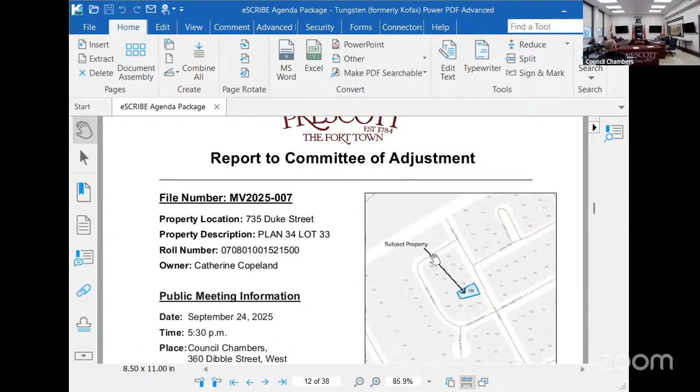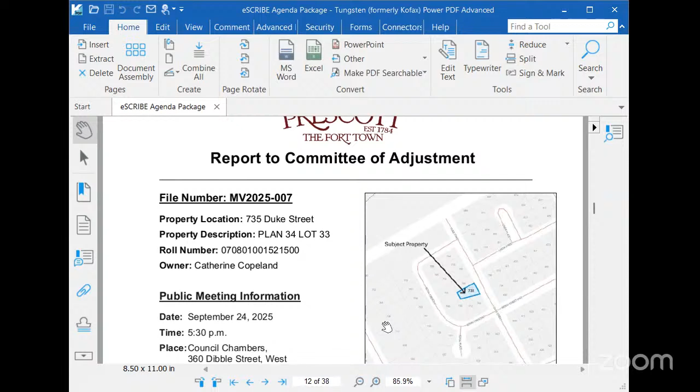Yes, thank you, Mr. Chair. Can you hear me? Yes, I can. Thank you, Tim. Perfect. Okay, so this is a minor variance to reduce the front yard setback and the side yard setback for a proposed carport, which is going to be located on the south side of the dwelling.

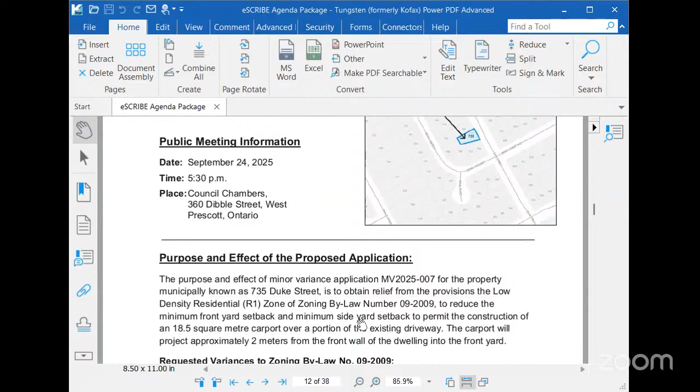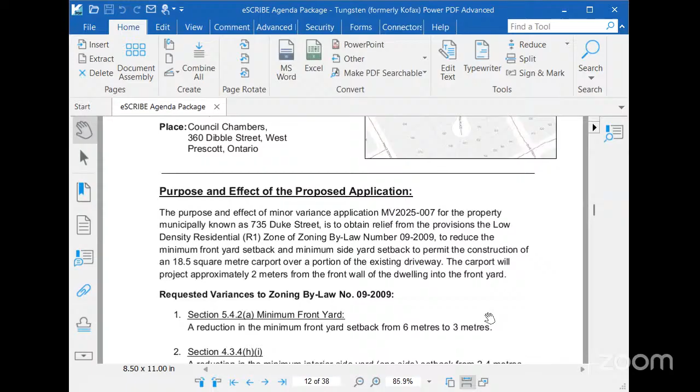The property is designated residential in the official plan and zoned low density residential R1 zone in our zoning bylaw, which is the same zone within the neighborhood and on the abutting lots as well.

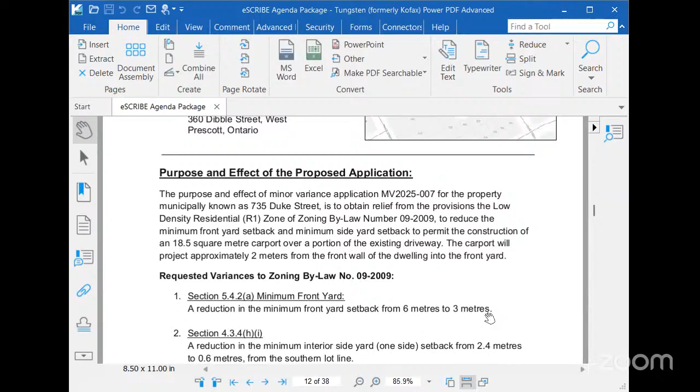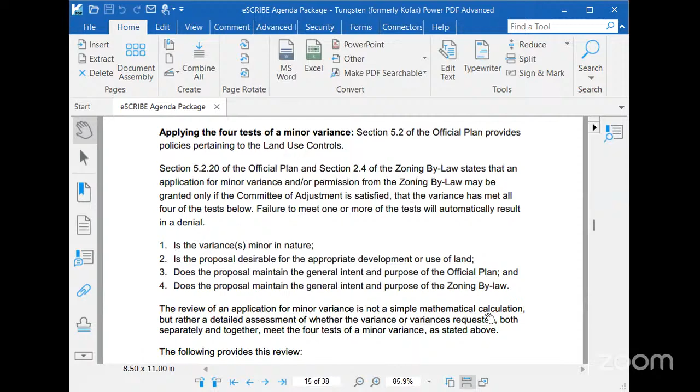In regards to the 4 tests of a minor variance, we have to ensure that the variance is minor in nature, that the proposal is desirable and appropriate development for the use of the land, and that it maintains the general intent of the official plan and the zoning bylaw. I'll just go through that once so on the next application we don't have to go through it again.

So in regards to this proposal, we worked with the applicant to come up with a plan and setbacks that could accommodate a carport or some sort of covering in order to keep her car out of the elements.

We are looking to support a 2-foot or 0.6 meter setback for the side yard, which would accommodate location of eaves and eaves troughs and ensure that would not encroach into the neighboring property.

And the reduction in the front yard setback, the projection of the carport would project out roughly to the same point of where the walkway is on the existing house.

The reduction in the front yard setback would not interfere with existing parking on the property right now. It would actually still provide 1 parking space within the carport and another parking space which is partially on her property and partially on the road allowance, which is not the travel portion of the road. So it can still accommodate 2 parking spaces here.

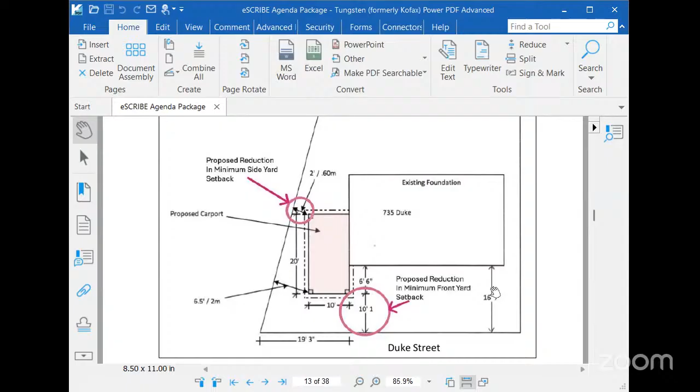So in regards to the neighborhood, we took a look around at what was existing and if there were any other similar projections, and what we can see along Duke Street was there was a garage that actually protruded from the house, almost similar to what is being proposed here.

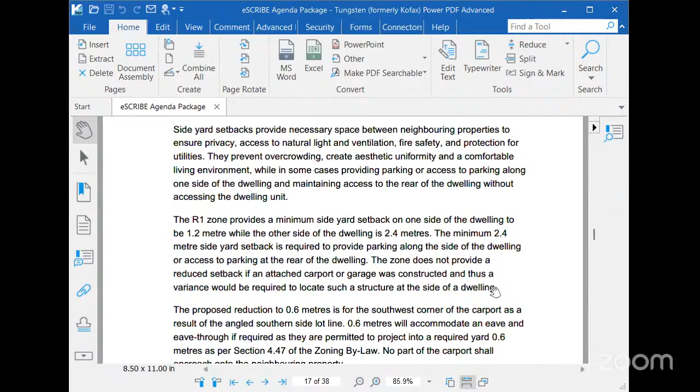And another projection, which was a couple houses down, which was a covered porch. So there has been some projections within the neighborhood, so what they're proposing is in keeping with the existing development.

So when we're looking at the 4 tests, does it meet the general intent of the official plan? Yes, it does. It still maintains the residential character and the intent of the residential development. The residential development on the property is not being changed. It's actually going to provide the owner with covered, secured parking here.

Does the application maintain the general intent of the bylaw? Based on our opinion, yes, it does. The front yard setback will still keep the buildings roughly in line with the existing development in the neighborhood.

There wouldn't be creating any new projections that would cause any new traffic issues or sightline issues or be out of the ordinary of what's already existing.

Again, the front yard setback, that's more or less put into place to ensure that a parking space can be situated on the property before it hits a structure. And in this case, it will comply with that. And like I said, it is in line with existing development.

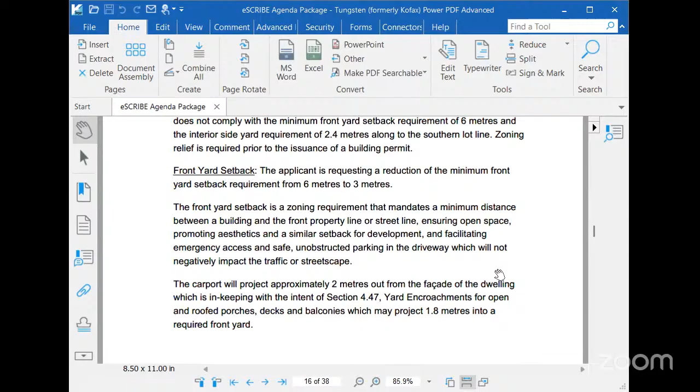The interior side yard setback, there's a few reasons why we have that, but in this case it's to ensure that drainage is being protected, and there is some separation between the two uses on the subject property and also on the neighboring property.

Drainage, we feel, will be addressed by having the eaves troughs, or at least the roof design, drain from front to back instead of off to the side.

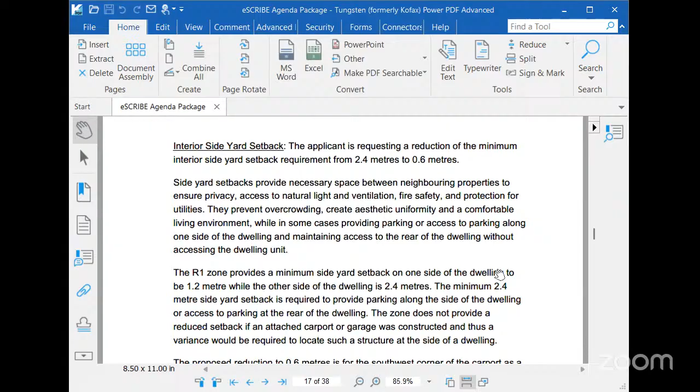And as a condition, we have asked that eaves troughs be located to the front or back and not to the side closest to the neighbor, to ensure that there's no potential drainage issues.

If there are drainage issues at a later date in regards to eaves troughs being pointed in the wrong direction, on a complaint-driven basis, we will go out and ensure that they're pointed correctly.

So is the application minor in nature? We do feel that the projection is minor. It is in keeping with the existing development in the area.

Is it appropriate and desirable development? We feel yes, it is. We again feel that it's in keeping with the existing development in the area, and it does give flexibility to the owner to provide covered parking on an irregular shaped lot.

So notification was provided by mailing to 33 property owners who fell within the 60-meter radius.

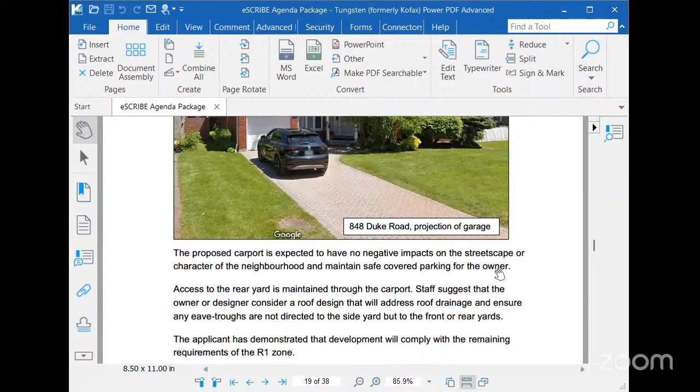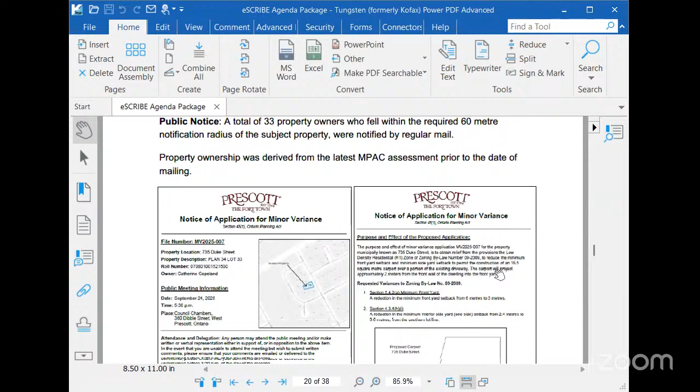Public signage was posted on the property as well. The applicant has provided a concept sketch and elevation details, and planning staff recommends approval of the proposed variance based on our conditions. I leave this in your hands.

Thank you very much, Tim. Now I will ask the committee first if you have any comments or discussions on the proposed variance and the planning report that was presented. Well, I was there last night and it looks good to me. I can't see any problem with the development at all. Okay, thanks Craig, thanks Louis.

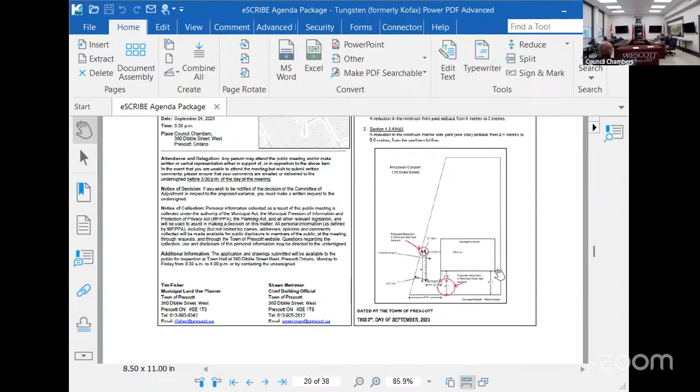Is the applicant present, and would the applicant wish to speak to the application? I am present, but I don't really have anything to add. Okay, thanks very much. Are there any members of the public present to speak to this application? Seeing none, thank you very much.

Committee, the planner has indicated that the minor variance meets the four tests as required by the Planning Act for the committee to consider. So I will now call a question for the recommendation. All in favor? Thank you very much. Motion is carried.

Okay, we'll go on to item 5.2 on our agenda. It's a recommendation that the Committee of Adjustment approve the following minor variance. It reads as follows: that the Committee of Adjustment approve minor variance application MV 2025-008 for the property with a civic address of 424 Wood Street East, to obtain relief from the provisions of zoning bylaw number 09/2009, to increase the maximum fence height allowed in the side and rear yards, and to address the grading change at the northeast corner of the property.

So the fencing is to address the grading change at the northeast corner of the property. The requested variance to zoning bylaw 09/2009 is as follows: Item 1, section 4.12 bracket A bracket 1, residential fences. The requirement, as the bylaw reads now, is that the maximum height of a fence along the interior side or rear lot line shall be 2 meters or 6.5 feet, measured from the average grade.

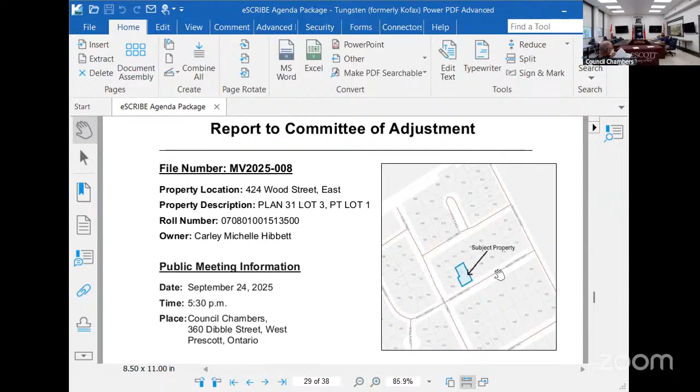From the committee, do I have a mover and a seconder for discussion purposes? Thank you. I will now ask Mr. Fisher, again our municipal planner, to speak to the report. Mr. Fisher, please. Yes, thank you, Mr. Chair. So this is a minor variance application in regards to a fence that the owner would like a slight increase to the maximum height requirement.

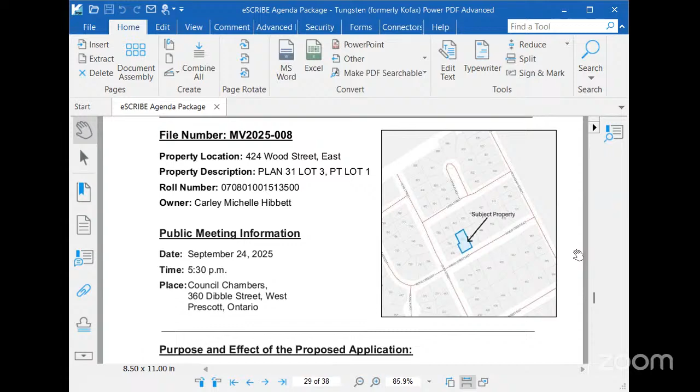This would only be applied to a 28-foot portion along the rear lot line and approximately an 18-foot portion within the side lot line. This is just to accommodate a drop in elevation. What the increased height will do is level off the fence, so that corner would not look like it's totally dropped if they had to keep with a 6.5-foot fence.

So again, the property is located in a residential area. It's surrounded by single detached dwellings. This particular property does have quite a bit of vegetation along the property lines. The fencing would not appear to have any negative impacts on adjacent neighbors because of the added vegetation along the property lines.

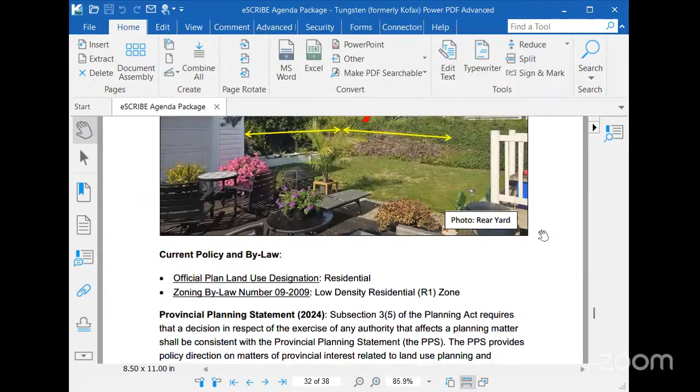So the property is designated as residential in our official plan. It's zoned low density residential R1 zone, and so are the adjacent lots as well. Again, the minor variance is required to meet the four tests, which I've previously gone through.

And in regards to the official plan, similar to the other application, it's residential. The proposal is not changing the use, and the fence is accessory to the residential use and will provide secure fencing for the owner on the lot. So it is in keeping with the intent of the official plan here.

Does the application maintain the general intent of the purpose of the zoning bylaw? In regards to the fence itself, it is required to be 6.5 feet in maximum height. However, we have addressed requests to increase the height requirement to address either grade scenarios or special impacts or screening from adjacent neighbors, that sort of thing. So this is quite common that we've seen in the past.

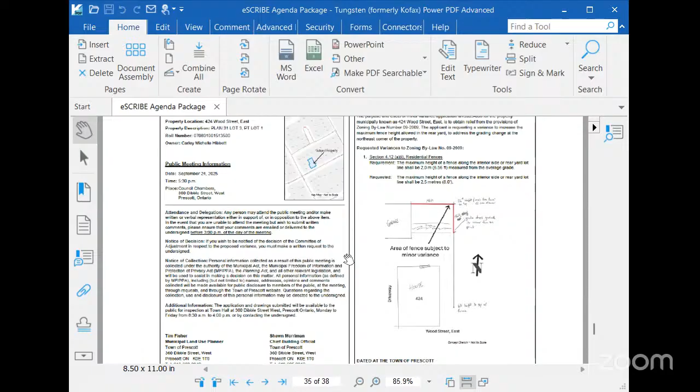So in regards to notice, we sent out notice 10 days prior to the meeting to 29 property owners who fell within a 60-meter radius of the property. Signage was posted on the property as well. And the applicant provided a concept sketch showing where the location of the fencing would be. Planning staff recommends approval of the minor variance subject to our conditions, and I will leave it in your hands.